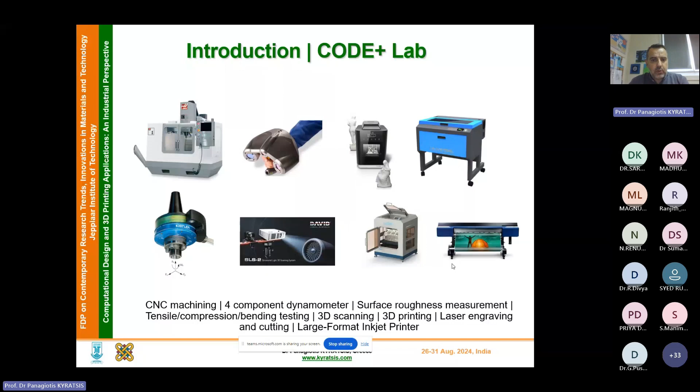As far as it concerns the pieces of software that we use, we have a variety of CAD/CAM and CAE software like SolidWorks, AutoCAD, Inventor, and so on. For linear and non-linear analysis using finite elements, we usually use ANSYS and Deform 3D. We have a separate CAD software for packaging design, and extensively we use Rhino 3D and Grasshopper, as we will see later on.

Let's start with a small introduction about CAD-based application programming interfaces. In design and manufacturing, this is a relatively new topic. What we do with the API is provide the user with possibilities that lead to productivity enhancements. At the end of the day, we are programming the API of a CAD system to achieve several things, like automatic operation of various CAD features, to interact between different software modules we've built or that already exist from other manufacturers, or even to accommodate a series of engineering calculations.

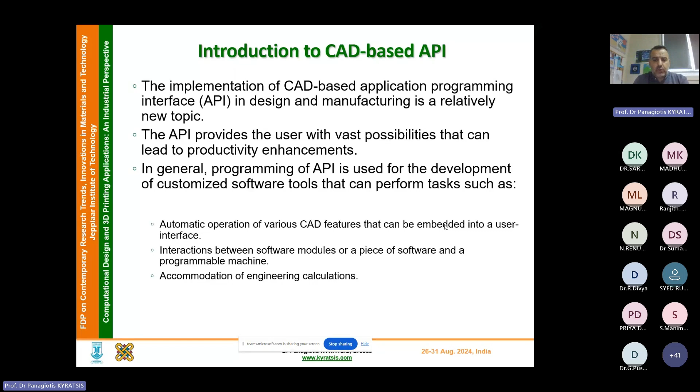Of course, there are a number of highlights we usually stick to in presentations, like enhanced productivity, improved work time allocation, quick and easy error recognition during the product design cycle, and reduced times. The time we save, we can use for something more important during the design of the product, like better implementation of design ideas or better handling of product development.

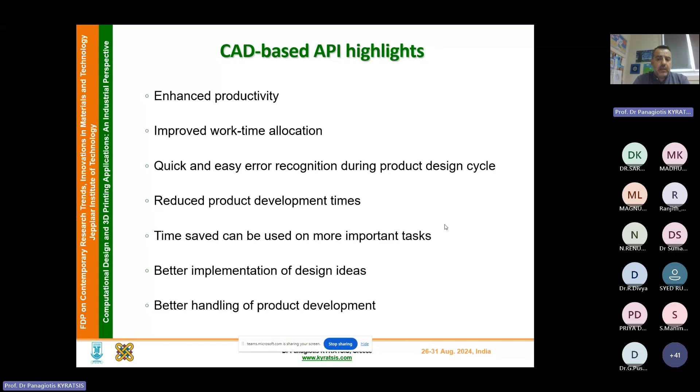But unfortunately, there are some drawbacks in this direction. First, it requires understanding of computer programming. As we know, my background is mechanical engineering, and we don't like programming. So usually engineers don't like programming, especially those from a mechanical engineering background. If we push through that, sometimes the benefits aren't worth the investment in time and resources. And the last one, probably the most important, is the lack of thorough training guides. Usually CAD manufacturers don't actually provide access to these kinds of tools, like the language we can use to build our own tools. So it takes a bit of effort to go in this direction.

Let's see what I mean by a CAD-based design manufacturing tool. What we try to do is create various modules that can be combined together, building several software tools. In other words, we can build a platform with a lot of tools, and actually design different things. In this case, we can facilitate usually time-consuming tasks, and all the time we can extend the functionality of this platform using the code that is available to us.

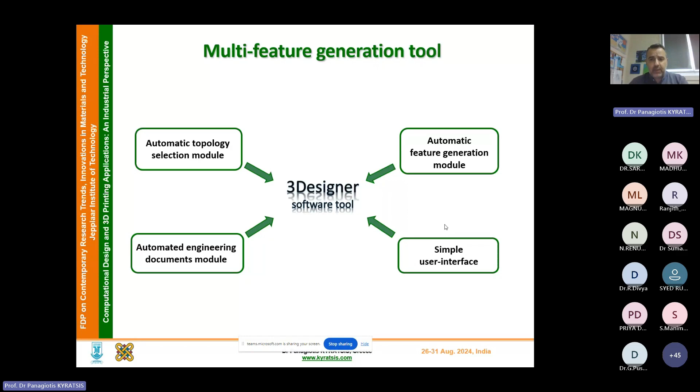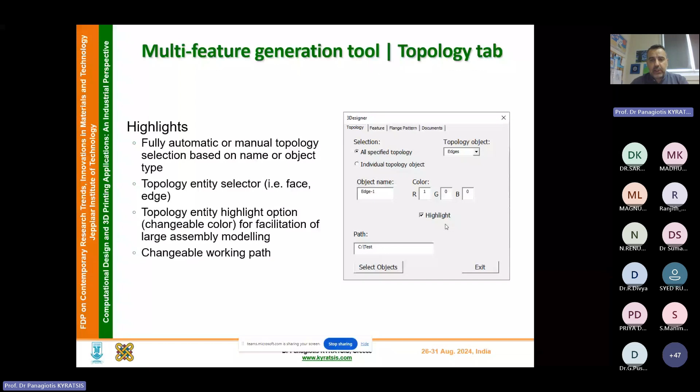Let's say I've decided to show you a simple example, like the 3Designer. Here we have the layout from the user's point of view, and you can see we can do fully automatic selection of different object types. We can have some topology entity selection, highlight these selections, and work along the hard disk we are using. In other words, what you see here is the part itself, the model of whatever we are designing, and we can select different entities. We can highlight them, but mainly the idea is to be able to automatically select entities like faces, edges, and so on.

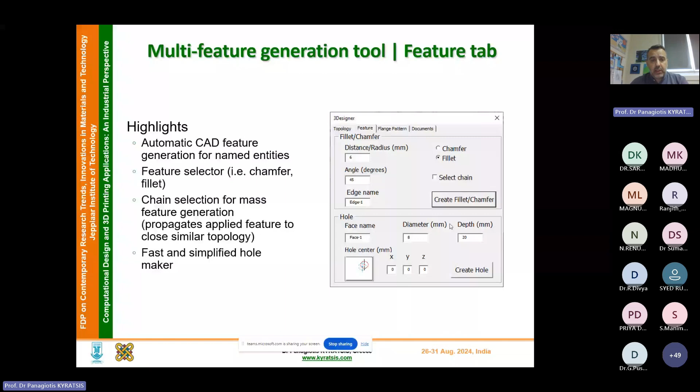We have other tools that let us automatically create different features like chamfers, fillets, different holes, and so on. You can see there are different layouts we give to the user, and we can automatically select where to do a chamfer or a fillet, or give the position of a hole, and what kind of properties we want to give to the hole each time.

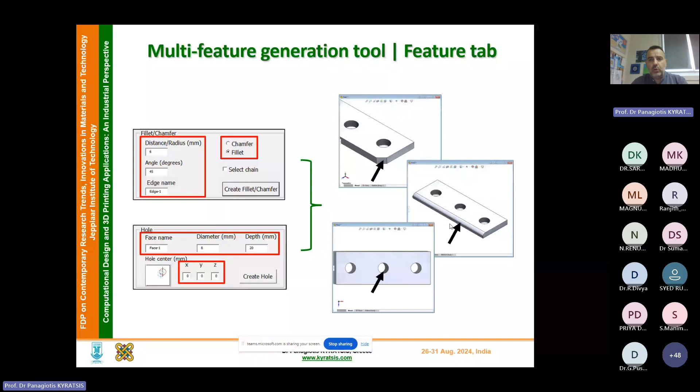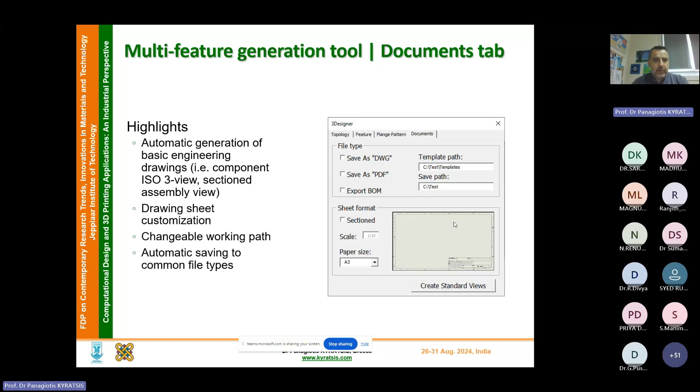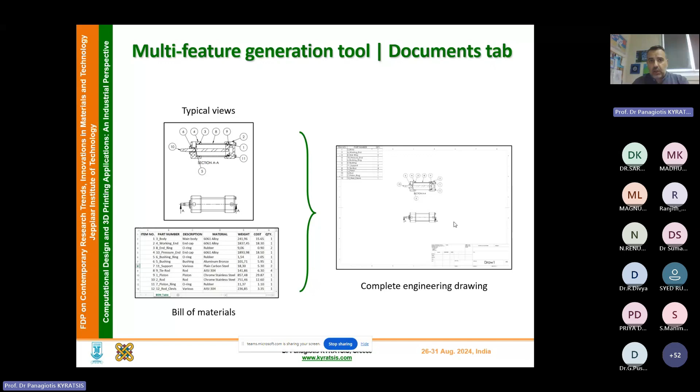As you will see on this slide, we have some typical views of the mechanical drawings from the assembly or from the part point of view. We have the bill of material, and we have a complete engineering drawing set in order to help the manufacturer to actually produce this kind of products.

What about if we need to do it a bit differently? Usually this is the case when we have some geometries that are more unusual, let's say more complex. In this case, we have to change the tool that we are using, and we have to go towards some visual and textual programming language, which you will see later on what I mean with that. We program, and the screen is something like that.

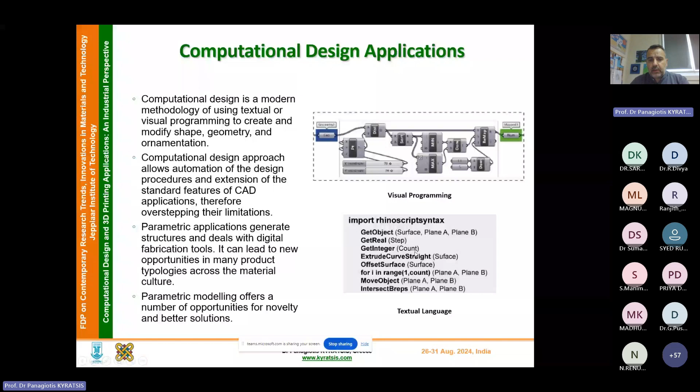There are different boxes. We call it spaghetti, and we have different lines, inputs and outputs, and we have to connect all these in order to run the program. And this is what we call visual programming. Inside each box, we have some kind of code, which in our case is written in Python, in order to incorporate the functionality that we would like to introduce in our application.

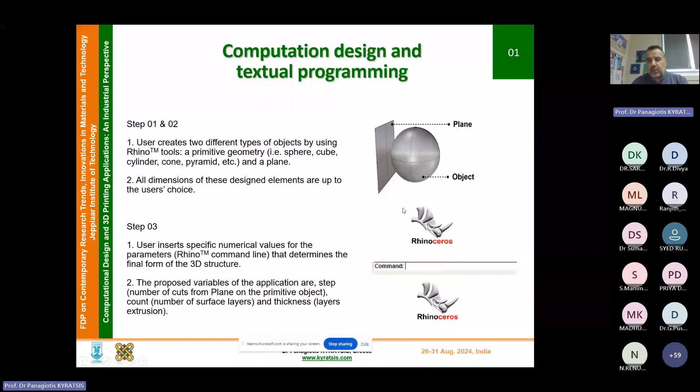I have some simple examples here. If we have a plane and we have an object, whose geometry can be whatever we want, we can have this script. It's a Python script. There are some parameters; I will skip the details of it. And then the output is going to be this geometry sliced.

And depending on the values that we have in each parameter, we can have different slices over here and different results. What we design is a family of products, because we are able to have a variety of alternatives. And what do we do with that? We can use a CNC laser cutting and engraving machine in order to actually manufacture that, because we don't only have the slicing, but we have all the geometry information, and we have all the drawings available.

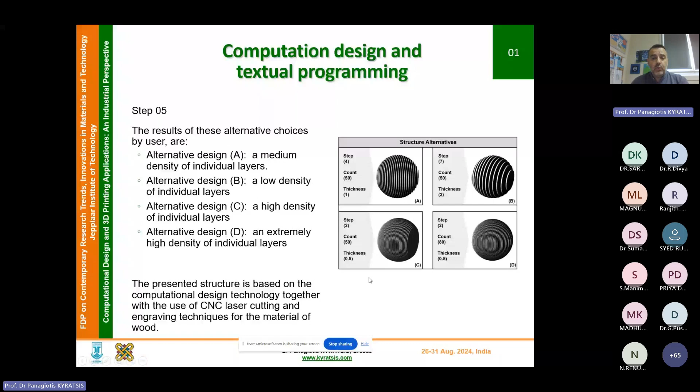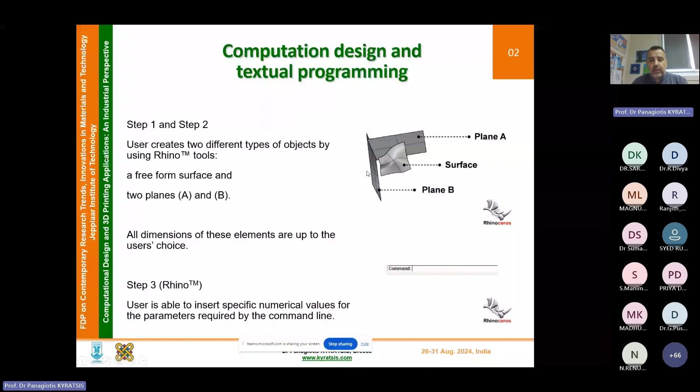If we would like to build something which is a bit more difficult, we can design a surface, whatever surface we want, and we can have two planes. We run a piece of code like the one that you see here, and this gives a result, what you see here, a very funny, unusual structure, which can be used in a variety of areas like architecture and so on.

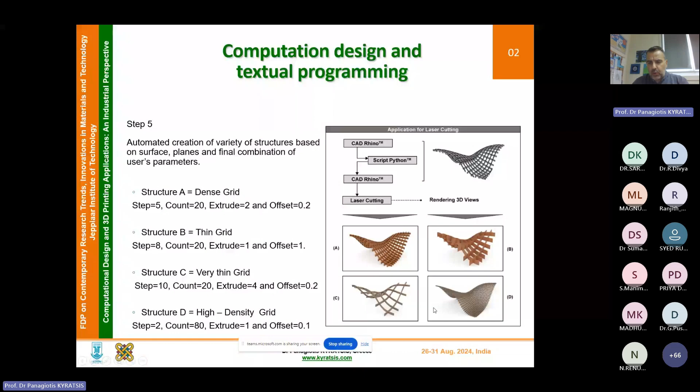The main idea here is that depending on the values that we select over here for each parameter, we can have all these alternative designs. And when we have all these alternative designs, we can select which one we like from the aesthetics point of view, from the technical characteristics point of view, and so on. And we are able, again, to use some CNC laser cutting technique in order to manufacture either the product itself or the prototype in a scale.

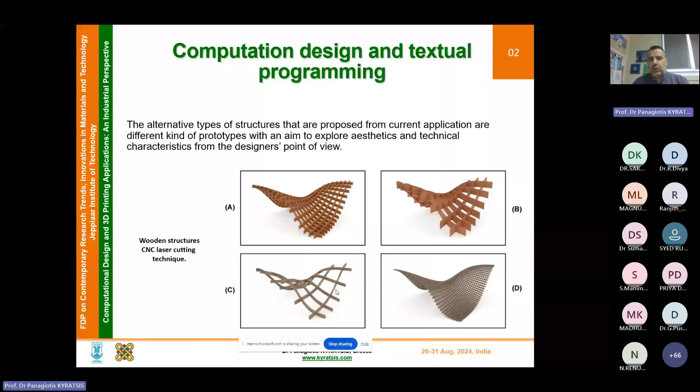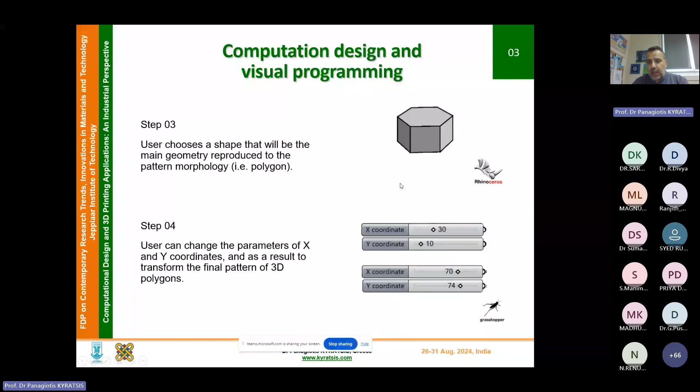What about if we would like to insist a bit more on using the visual programming tools? As you see over here, we don't actually have a Python piece of code. We have all these little boxes connected to each other. And we can build a simple geometry. For the sake of the argument, I'm putting something simple. And then we can apply different algorithms over here, some patterns and so on.

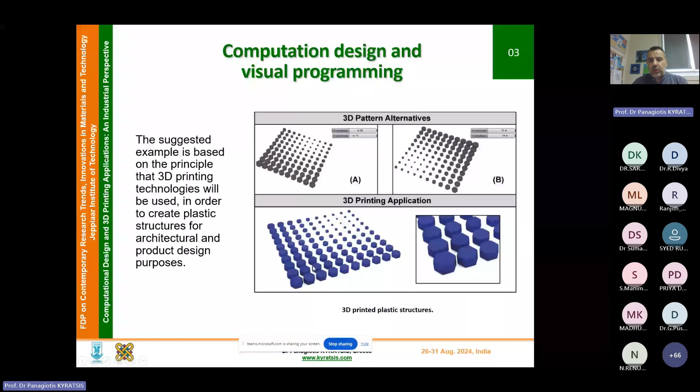And depending on the values of all the parameters, we are able to have all these parts. And then at the end of the day, we can 3D print this kind of plastic structures in order to have them available.

Now we start getting to something which is a bit more tricky, something more difficult. What about if we would like to have a graphical algorithm for the design and the assembly of a DIY desk workstation? You see here there is an image, but I'm going to explain it in more detail. We can have this DIY desk workstation.

We can design it by ourselves, we can set all the parameters, and we have alternative designs. And at the end of the day, what do we get? As we will see later on, we get all the drawings, the mechanical drawings for manufacturing the desk workstation.

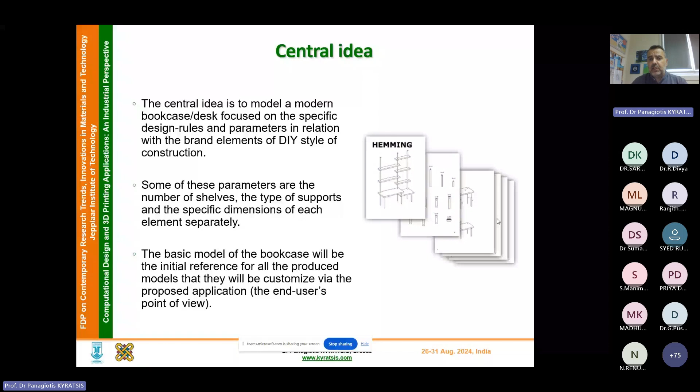And the most important is we have this leaflet, because when we buy a DIY product, we need a leaflet in order to lead us how to assemble it. And all this, depending on the parameters that we change, we have the customized leaflet that is built based on the parameters that the user is using. Like in this case, as you can see, we have the furniture preview, we have the different parameters here changed, and we have the export of the files.

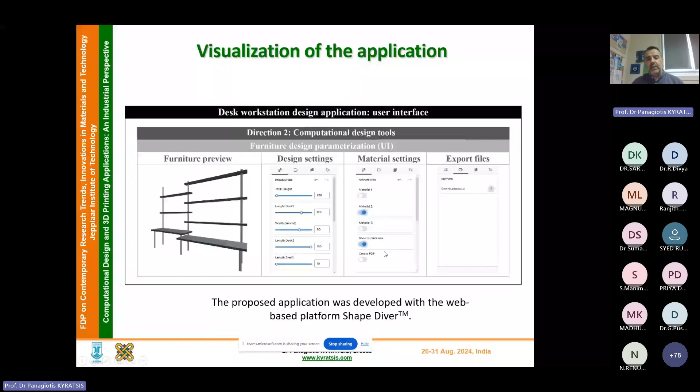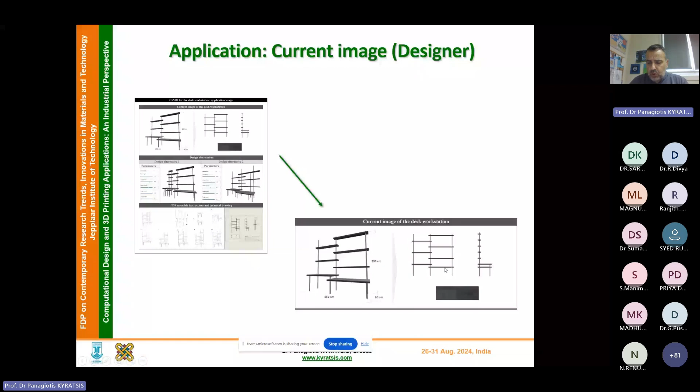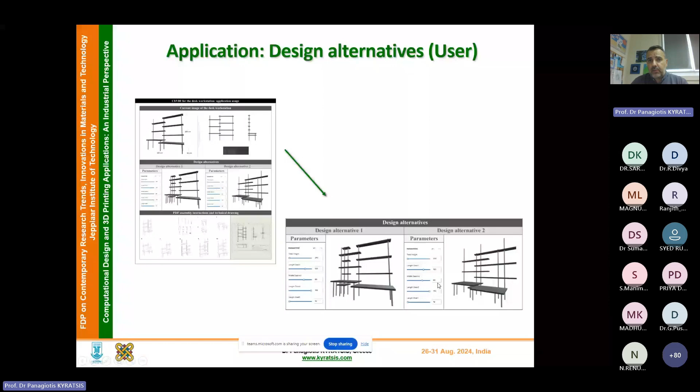And then out of that, we have the drawings, we have a bill of material, we have the cost of the DIY, and so on. We have design alternatives. Every time we change the different parameters here, we have an alternative product. While at the same time, from the customer point of view, you get not only the drawings which the manufacturers need, but in this case, you get the assembly instructions of how to actually assemble it at home.

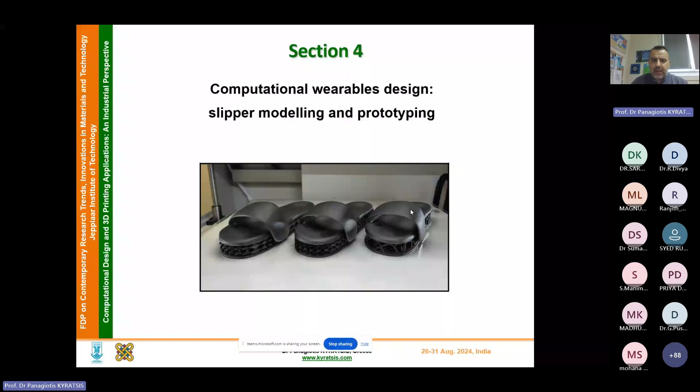Let's go to something that might look more interesting. Slipper modeling. A number of publications that we have is on wearable design. In this case, I'm going to present you some slipper modeling and prototyping and what we have done with that. But as you will see, there is a lot of engineering behind the scenes, although at the end of the day, what we have designed is the slipper sole. In this case, the main aim of the research is to design a customized pair of slippers for the user. In this case, what we need is a 3D scan model of the foot.

Hopefully, you can hear me well. Can you hear me well? Kindly, participants, kindly turn off your audio, please.

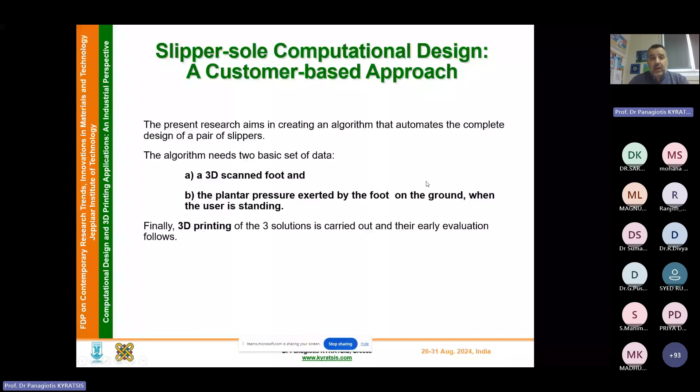Okay. So what we need is, let's say, two directions, some basic data: the 3D scan of each one of the feet of the customer, and the plantar pressure from each foot that we get when the user is standing on top of the machine. At the end of the day, what we want is to have a 3D printing of whatever slipper we have designed.

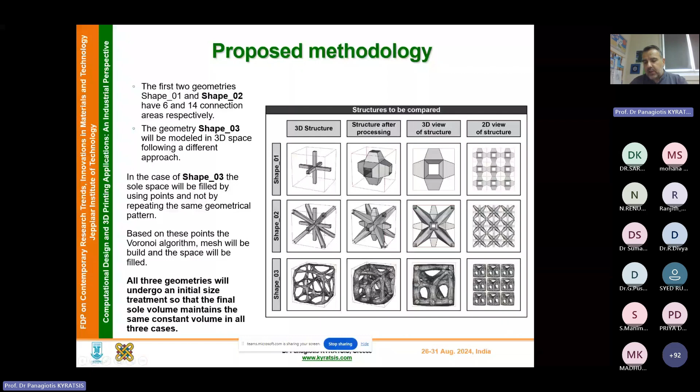If we skip a bit the technical aspect, I should say that usually we work in 2D initially in order to be able to build the algorithm that is going to connect the pattern that we are going to use every time. And after we are able to control the pattern and how this pattern propagates in the 2D geometry, as you can see over here, then we work on the 3D, as you will see on this slide. In this case, we have three strategies, three different pattern geometries that we use, the first, the second, and the third. And you can see the pattern itself, the geometry, and then how this is transferred to the 3D geometry.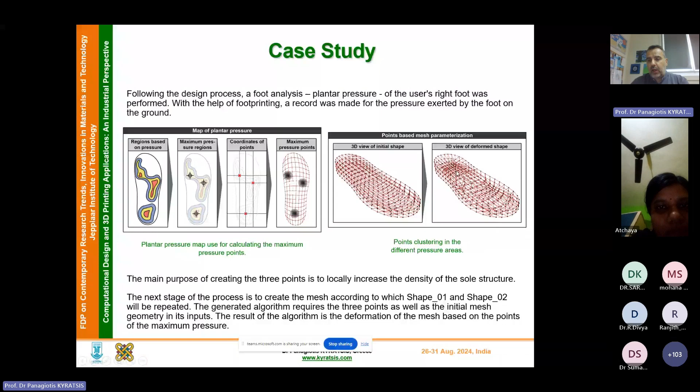And automatically, again, we can create the 3D view of the sole of the product itself, and this is the deformed shape depending on where the areas of high pressure and low pressure are. And we have tried that with the three separate geometries. And you can see over here that we have the initial mesh, and over here, the mesh that comes when we have a higher density in the areas where we have high pressure, based on the data that we had initially.

But this is not the only thing. We would like to have the 3D scan of the foot itself in order to be able, at the end of the day, to build a product which is customized for this specific customer. So we are able over here to build the slipper which belongs exactly to this customer.

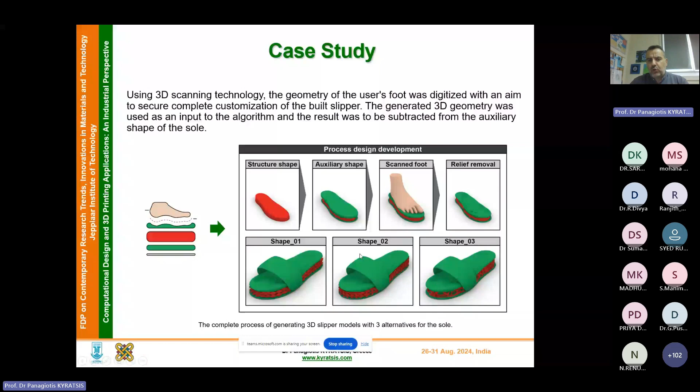And at the end of the day here, you can see the three different variations of the geometry used for the sole, and how we can actually make this kind of products. And now we come to how we are using 3D printing. In this case, we have a relatively big 3D printer, an FFF 3D printer.

And what do we do? We actually print these slippers, which are dedicated to the user who gave us the plantar pressure and the 3D scanning model of his feet, both feet. And then we print them out, and we were able to provide pairs in order to use them.

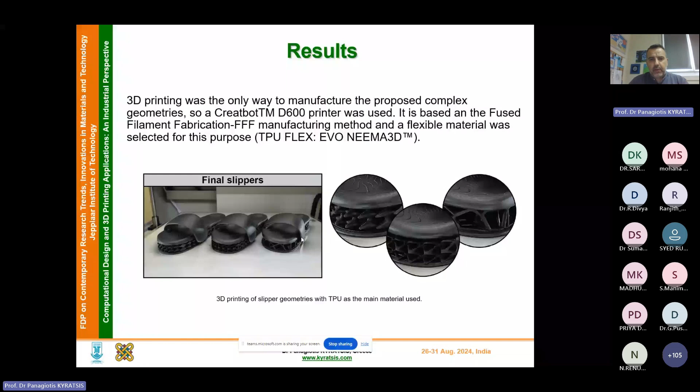From our side, what we are trying to do is to have all these advantages coming from the Industry 4.0 principles, to use CAD-based programming, 3D scanning, 3D printing, foot pressure data analysis, and so on, and try to incorporate new methods, new materials, new digital tools in order to have the customization of shoe-related products. And all these, I think this is the magic word, to be automatically done.

So what we design are integrated applications in order to have customized products. And in this case, we are able to provide alternative designs for each solution, because sometimes the user needs to see the product from the geometrical point of view, but from the aesthetic characteristics as well.

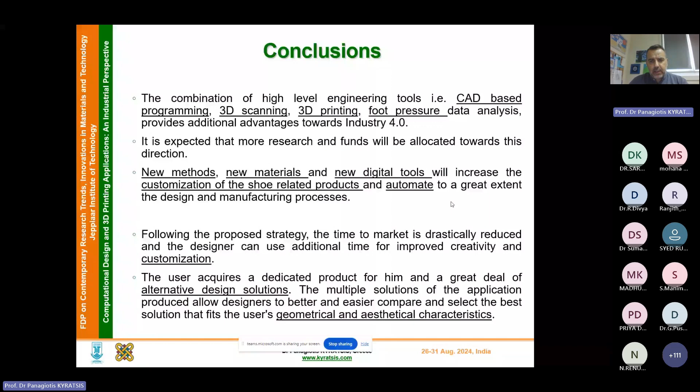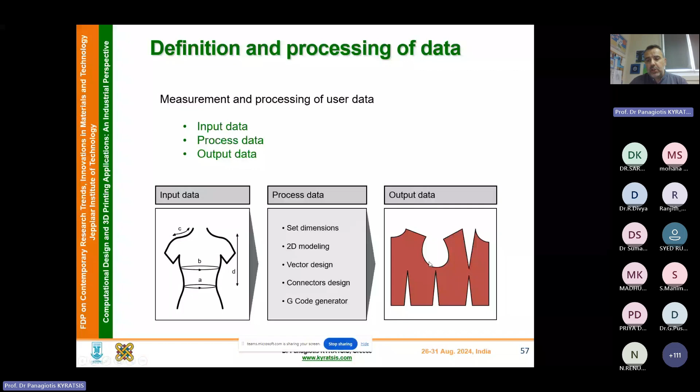What about if we go to another application like modeling and prototyping, something that comes from fashion? Let's say that we have this person here. We can measure different dimensions on the person, and then we can process the data and have as an output this 2D geometry. And this 2D geometry comes directly from this visual code over here.

And depending on the parameters that we are changing, we can have, as you can see over here, different geometries depending on the customized development of the product, depending again on each customer that we would like to offer the product to. And then there are some alternatives that you can see from the front or from the back view. In this case, again, using the code, you can have all these alternatives.

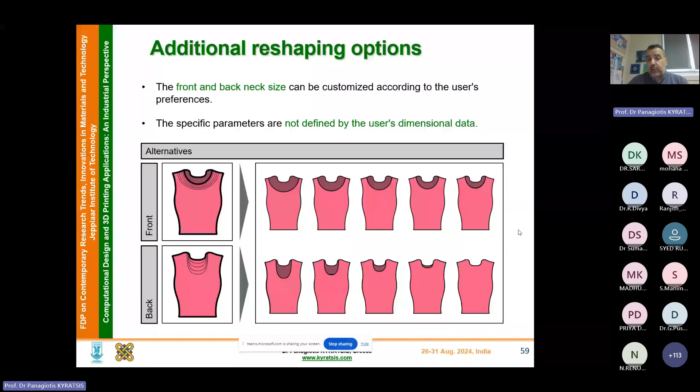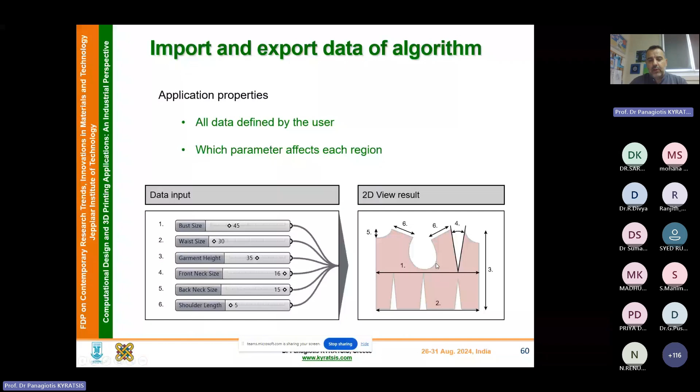And depending sometimes on the aesthetic characteristics, the customer needs to choose which one fits better or looks better and so on. So we have all these alternatives available. And we have all this data input, and you can slide over here the different values. And by sliding all these values, you have the alternative 2D patterns as a result, and a variety of alternatives for the product to be built.

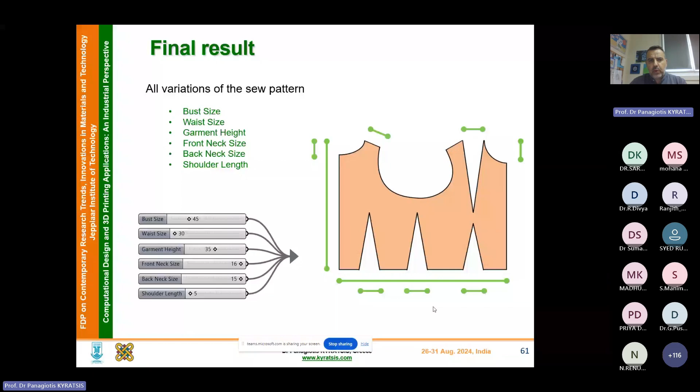At the end of the day, we are using 3D printing technology, an FFF technology, again on the same 3D printer, which is a large size printer. The size of the product that we can build is 600 millimeters by 600 by 600. And we are able over here with a flexible filament to build the different geometries of the pattern.

And then we need all these little components in order to be able to assemble them and have the final product assembled and wearable on the customer himself or herself. And as you can see over here, we have all these dimensions which lead to a customized product for the customer. Nowadays, we are preparing a new application for creating more wearable products.

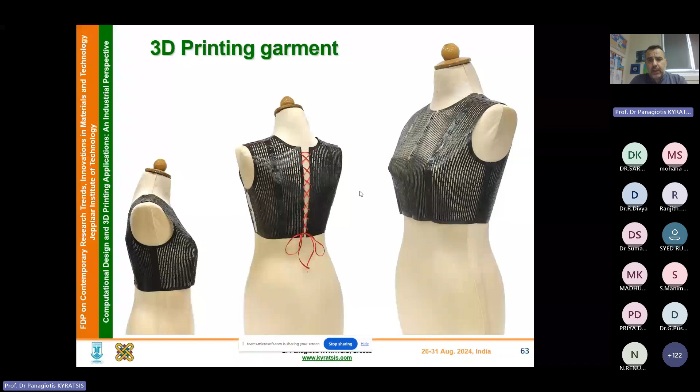There is a big question now. When we are actually printing all these materials, what kind of parameters do we use? What kind of values do we use for building all these materials and all these products? We are designing all that, we do everything automatically, we have access to the printer and all these nice pieces of technology. But what if we want to build something which is durable, lighter, or softer?

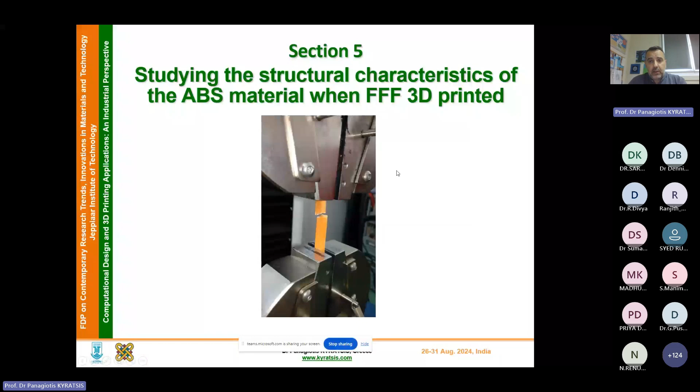So we started maybe in the last 18 months to work on the different structural characteristics of the materials using FFF 3D printing technology, in order to optimize the use of the parameters. We published this paper maybe 6 months ago, and I took some pictures of the things that we have done. We present research that examines the structural performance of the ABS polymer, using a shallow neural network to model how well it performs and fit the performance of this material.

We are not measuring only the strength of the material, which is usually the case in published applications. We decided to use the strength to mass ratio, because for us it's very important to have the strength to build the product, but at the same time to be as light as possible. That's why our latest publication was about the S to M ratio: as much strength as we need for the material, but as little mass as we can use.

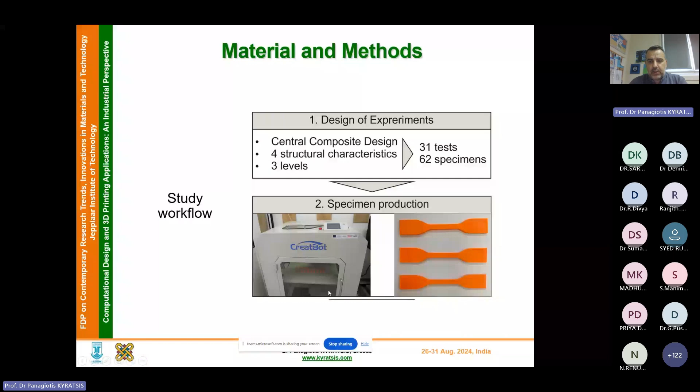We created the design of experiments setup based on the central composite design. We have 4 structural characteristics and 3 levels for each characteristic. The total number of experiments given by the central composite design was 31 tests, and we doubled every test, so we had 62 specimens. You can see our printer here and the specimens. All the specimens were numbered and weighed in order to know the weight of each one, and then we did the tensile testing.

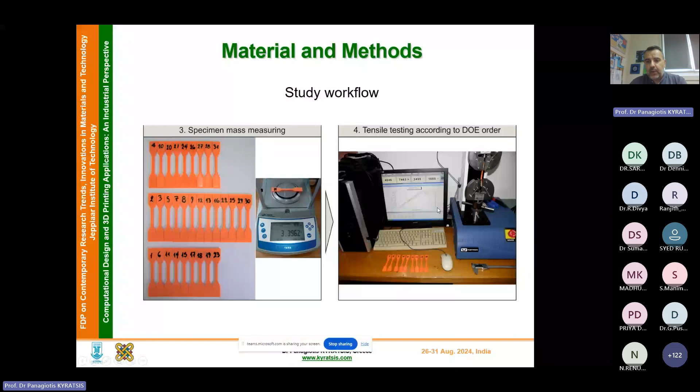Then we created the neural network model with a hidden layer. The structural parameters used are these 4, which can be incorporated inside the geometry, with 3 levels each, and these are the fabrications used for creating all the specimens. We followed the ASTM D638 standard, the geometry is the one given here, and this is the picture of

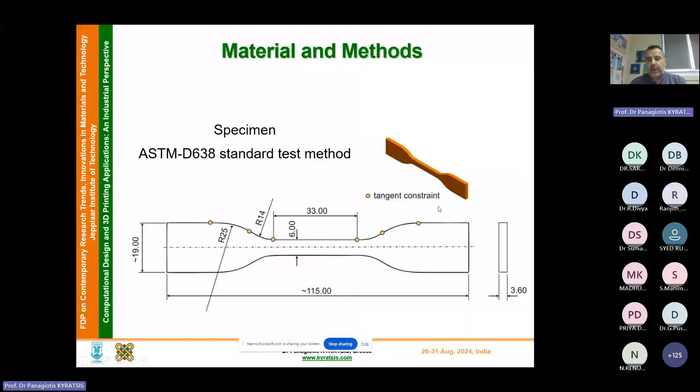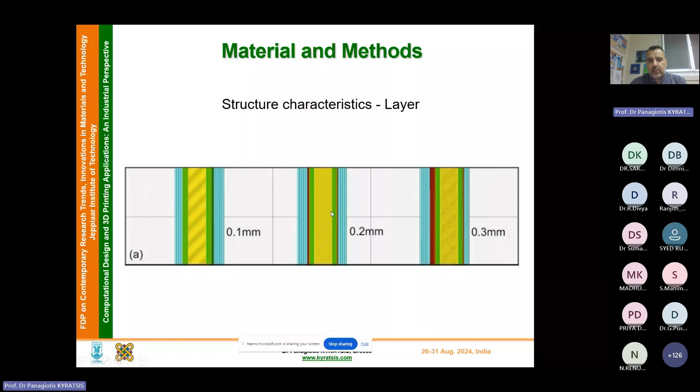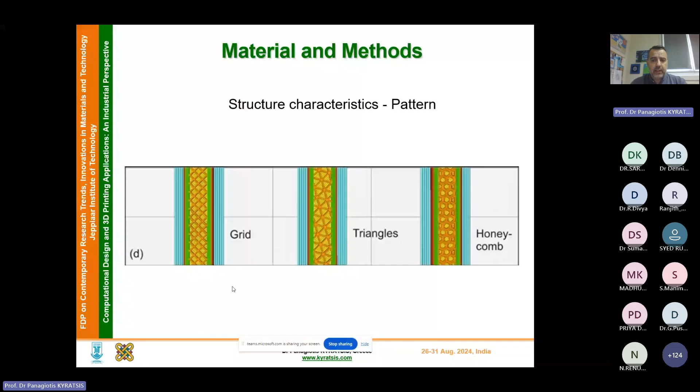the specimen. Depending on the layer, 0.1, 0.2, or 0.3, you can see how the inside of the specimen is, or depending on the infill, whether it is 20%, 50%, or 80%, where we have more material, or the line direction, 0, 45, or 90 degrees. We also measured the performance of different patterns, like grid, triangles, and honeycomb. We used the 3D printer shown here, which is quite big.

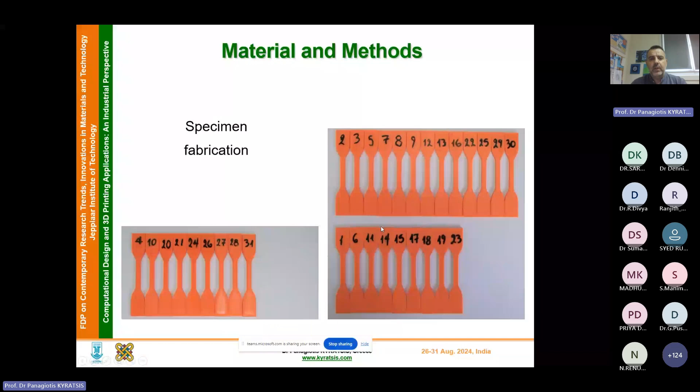We fabricated all the specimens and did the testing using the Instron 3345 in our laboratory. Some pictures here show the moment the specimens break and how we managed to weigh them.

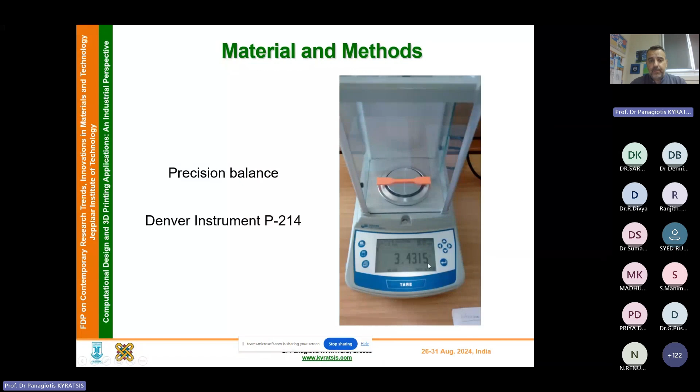As you can see, we have the accuracy of 4 decimals for each gram. And when it comes to the neural network, you have to go through some kind of trial and error.

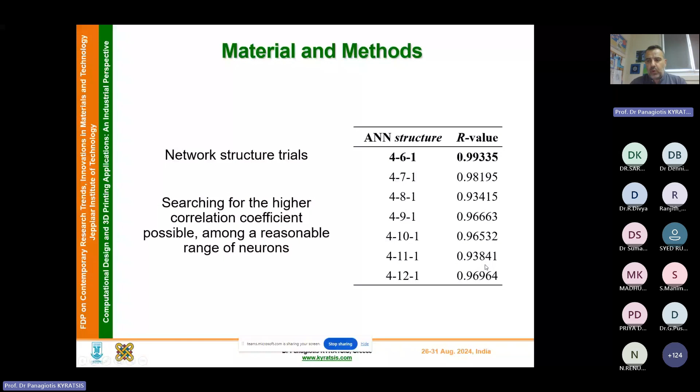In this case, the R value of the 6 nodes is supposed to be the most well performed, although this is not always the case, but this has to do with the neural networks. This is the neural network we built to incorporate the 4 inputs to run the network.

At the end of the day, to have the output, which in this case is the S to M ratio. If we go towards the mass, we had to do the data normalization. I will skip the details of it.

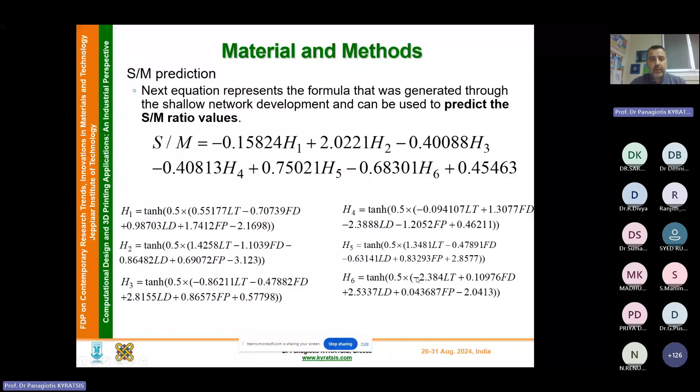This is the function that gives the S to M ratio in each case, and these are H1 up to H6, all the values of the constants we need in this formula. Then there was some network evaluation for training and validation.

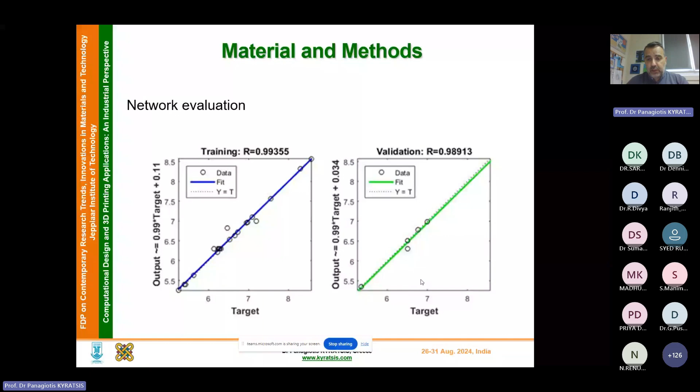Again, everything was supposed to be very good, and all the experiments were very well fitted using this neural network that we designed.

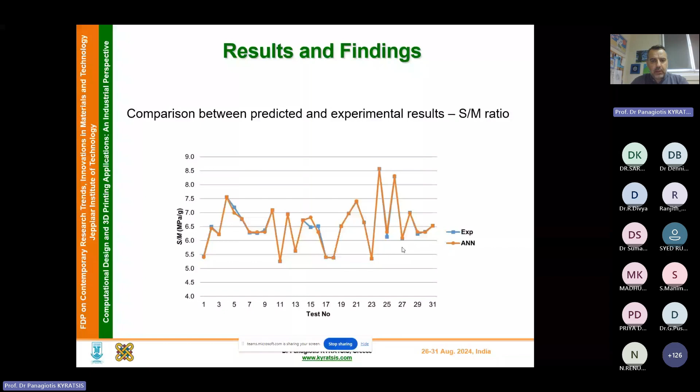For the conclusions, more or less it's what I have already mentioned to you. I will skip them for now.

I will go to something which, probably from the mechanical and manufacturing point of view, might be more interesting for some of you: how can we use CAD-based modeling, the CAD-based inserts, in order to use them in a nonlinear finite element analysis in machining. We will see some of the details of that.

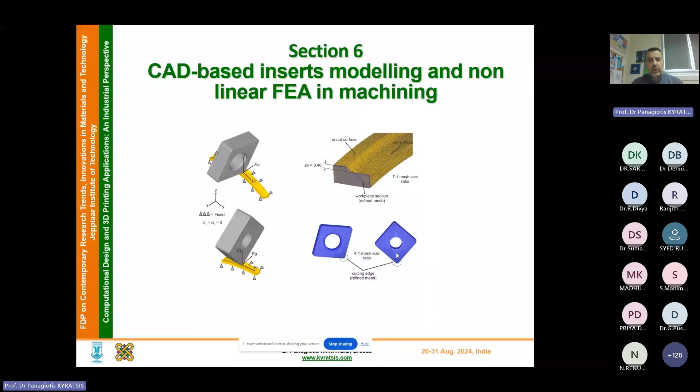We come back now to the CAD-based automated design of FEA-ready cutting tools. In this case, we have the opportunity to design either rhombic geometries or square geometries, and we can put in different parameters. In the end, this application gives the output, the geometry of the tool.

You can see over here the picture of a tool, the micro geometry, which is over here. At the same time, how this micro geometry is applied to the CAD model.

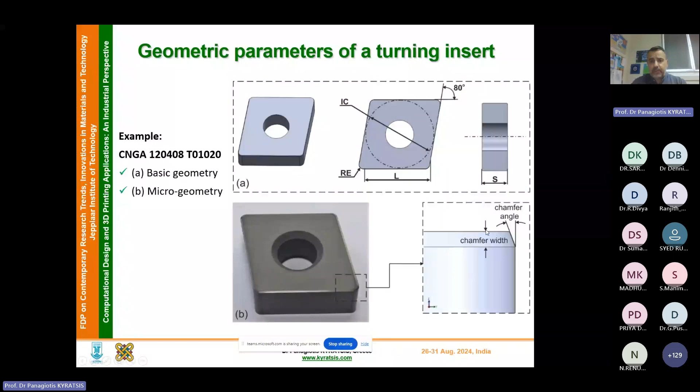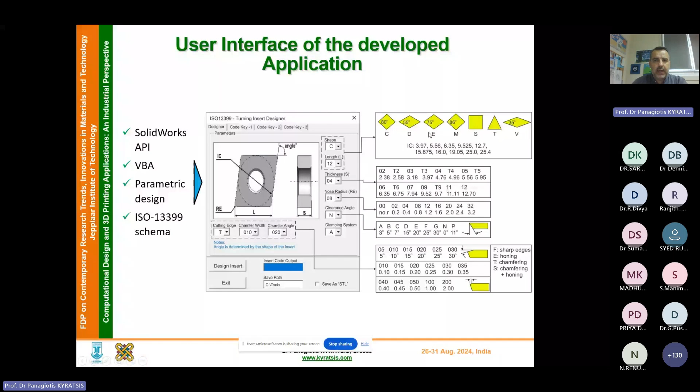Over here we have the application. Depending on the different selections, you can have a variety of cutting tools. I have prepared a little video here, it's not going to be long, only 30 seconds.

So you can see over here how we are selecting the different parameters from the menu, the user is doing that. At the end of the day, we are able to provide the design and manufacturing engineer with the tool to be used later on for the finite element analysis.

As you can see here, the time we need to build this kind of geometry is quite limited, and we can change the different parameters and have another tool.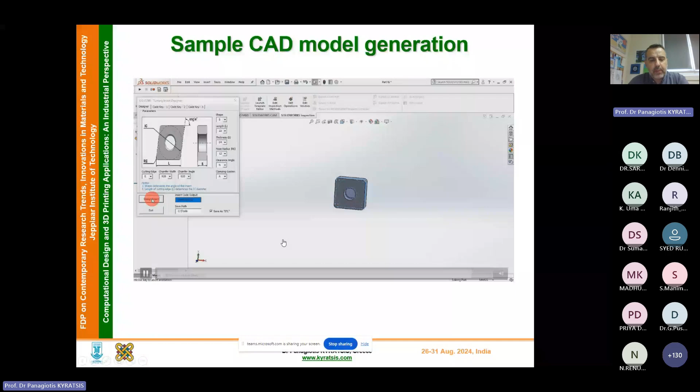I'm sorry for that. So I think you got the picture that it's something that happens quite quickly. So we have prepared this kind of automated design of the turning tool in this case.

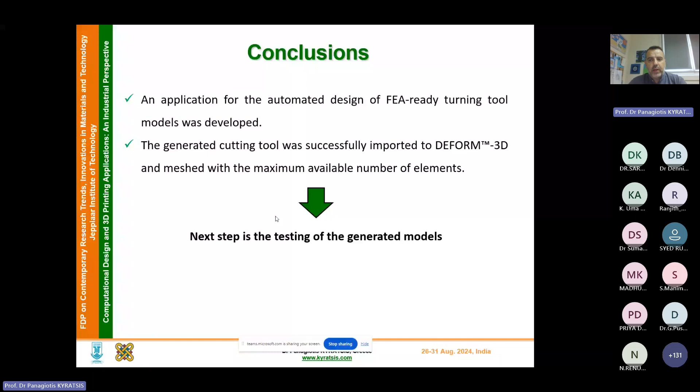And what about, can we actually test these models using some finite element analysis? In this case, we are using the Deform 3D piece of software in order to run this kind of analysis.

I will skip some of the details about turning and so on. The 2D analysis, which is usually the case, enables the use of an analytical rigid part that reduces calculation time. It simplifies the mechanical problem and is ideal for preliminary simulations.

In our case, what we prefer is the 3D analysis, which produces results closer to the real conditions and uses the full geometry of the tool. It is ideal for complicated simulations.

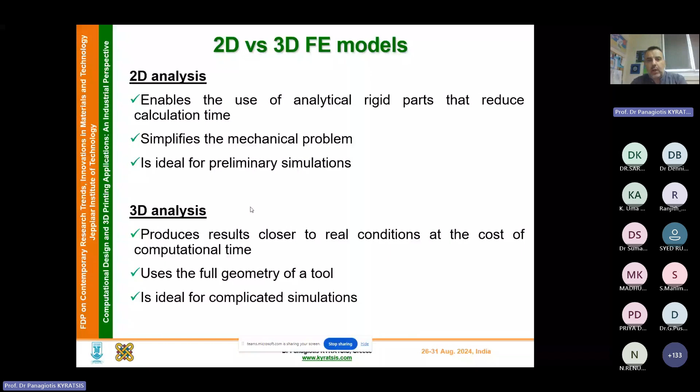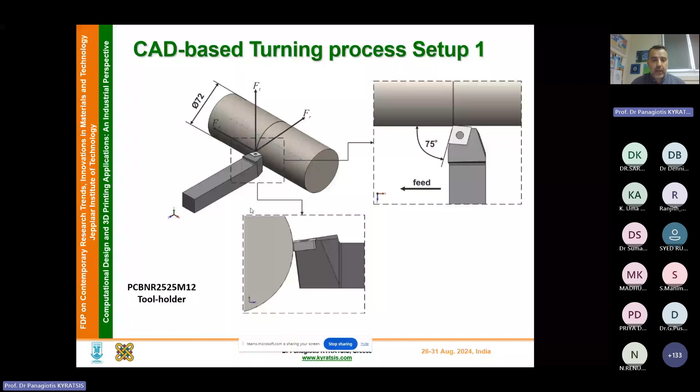You can see how our application creates this assembly and brings everything together so this model is ready to be inserted and incorporated into the FEA software. You can see from different directions and different tool holders what kind of selections we can have.

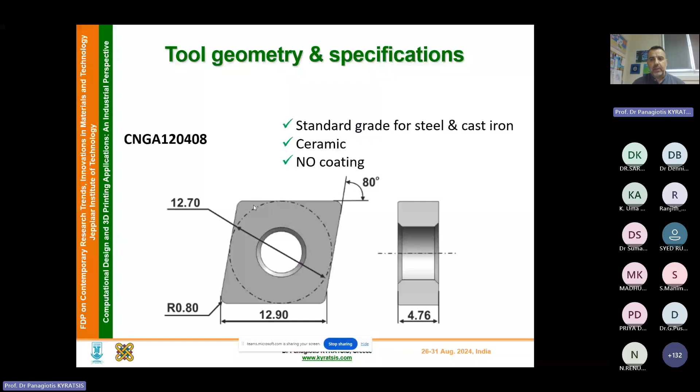We can simulate this manufacturing process and calculate not only the forces but the temperatures as well. For a rhombic geometry, we can use it like that, or for a square geometry we have all these parameters. You can see the micro geometry needed to be defined, and the different tool holders we need in order to position them correctly for the FEA analysis model.

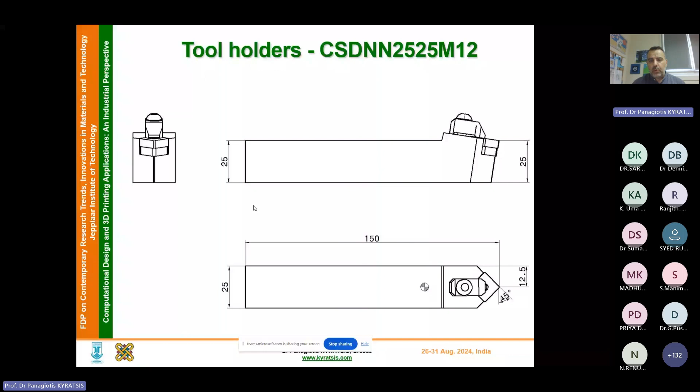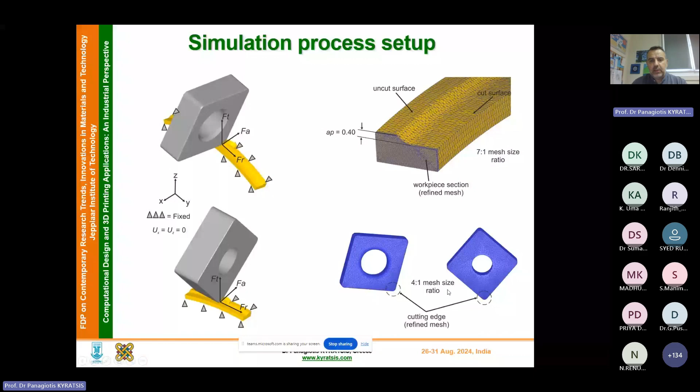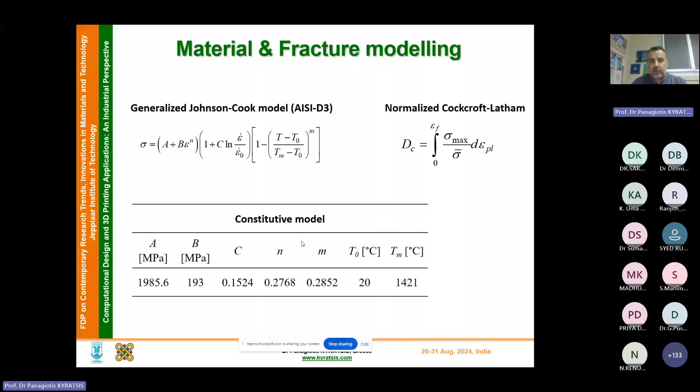I'll skip these details, but we have to set up the material and fracture modeling. In our case it can be a Johnson-Cook model because it's a non-linear change of the material properties, and for friction, the Coulomb law, with a friction coefficient of 0.6 in our case.

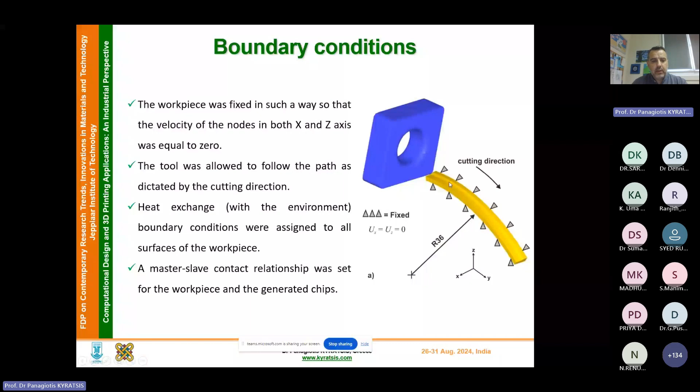We have to set up all the boundary conditions for both the tool and the workpiece, and then run the application. As you can see from a different view, this is how we create and simulate the chip which is produced when we actually manufacture the material.

You can see over here the steps, all the steps that you have to run each time. For each specific step, you have to run the model again, which is why the time needed is quite large, quite significant.

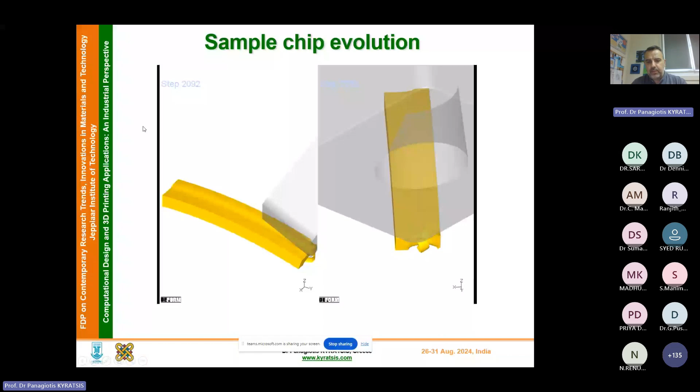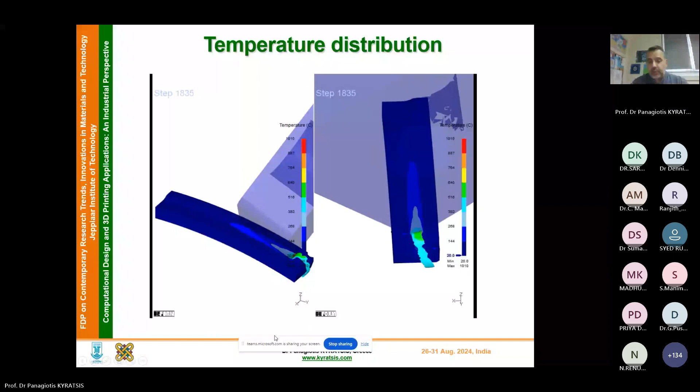You can see in this case the chip and how it propagates. Again, this is the temperature distribution in images, in order to judge what is the best solution for the tool and so on.

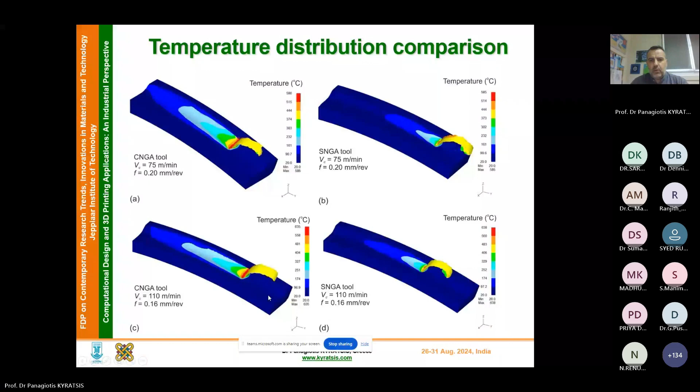I will not go through the rest of the results. I would like to thank you for your attention, and hopefully I have created some questions for you, or maybe some research and collaboration opportunities for the near future. Thank you very much.